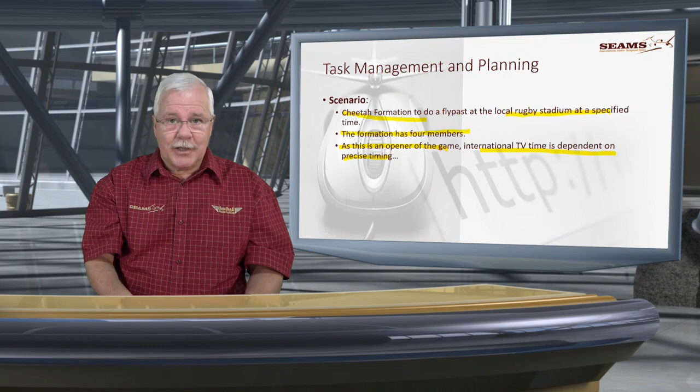Now there's a lot to say. Obviously, if you're in the sky, you are visible from there to there. So you're going to be visible for, let's say, 15 seconds or so before you actually overhead. But we're going to work on overhead time.

First one, clearances. I think this is quite important that we speak about it, because a lot of people think you just jump in and you're going to perform at this air show or with this opening of a school or whatever.

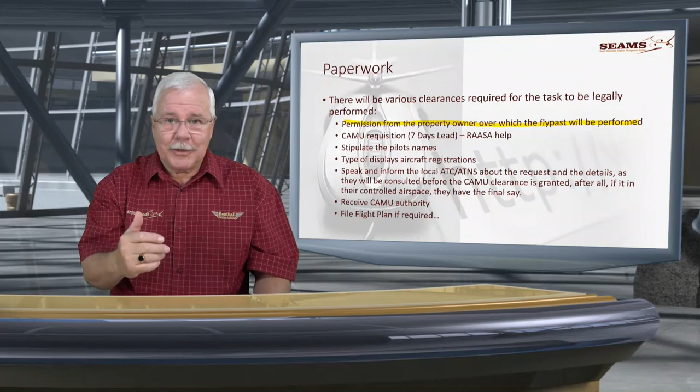There were various clearances and tasks to legally perform: permission from the property owner over which the flypast will be performed. There must be a request, okay? There is a request and then a permission that you can be part of it. Don't skip this - not word of mouth. Written, letter, proof, proof. When you go and you've got to defend your actions later on, there must be proof.

And then you've got your CAMU requisition, which is 7 days lead. RAASA can definitely help there. Stipulate the pilot's names, type of aircraft.

What we normally do is we start speaking with the local ATNS and all that. Although we get the clearances, remember that if it's in their controlled airspace, then they still need to know, and they've got preferences with other traffic, and they can give you quite a bit of trouble. So there must be prior communication, all right?

Talk it out nicely - this is what we want to do, this is the dependency, this is the time, this is where you're going to be, so that people can make plans, so that we don't interfere with national, international flights and stuff like that.

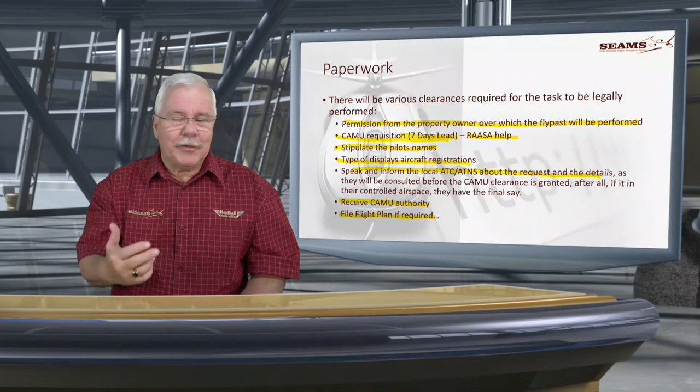Receive the CAMU authority, and then a flight plan if required. Flight plan is just one of the pieces of paper again, all right? Don't get frightened when you think about the flight plan. Put the thing in, because then ATC is now officially warned that you're going to be there. And you've spoken to them, and you made it official, and you've got the CAMU clearances and all there. So you should be ready to rock and roll.

In the beginning, the first thing is the leader of the formation needs to be appointed. Now I've spoken about this before - we tend to say, okay, you're not so good at flying there, so we're going to make you a lead. Lead, in this case, has got a phenomenal amount of planning to do. In the flying, in the execution of this flypast that you're performing, it's going to be important that he can think and fly. So be careful who you take as the leader.

The leader is briefed on precise requirements. Lead starts by studying the layout - Google Earth, map 1 in 50,000 if it's over an area, if you can get hold of such a large map. Not 1 in 500, not 1 in a million, 1 in 50,000. Google, I think that is probably presently the answer. I'm not even sure if they still make 1 in 50,000 maps.

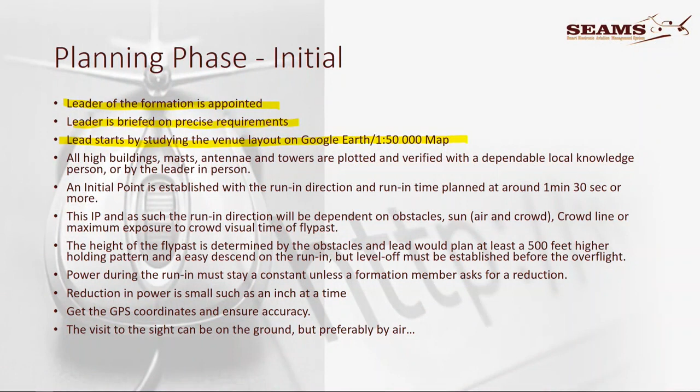All high buildings, masts, antennas, towers, everything must be plotted, and you plot it on. So let's say you've said, this is the area I'm going to work in. You take a picture from that, from Google Earth, and you start plotting your dangerous areas. You have to know the lay of the land.

No, you're not there yet - you haven't tried it, you haven't seen anything. This is prior to the thing. There must be excellent, proper planning. Remember, once you're in the run, you can't say, oh, I didn't think about that. That's going to be a national disaster if it's on the TVs and stuff like that.

An initial point is established with the run-in direction and the run-in time plan around 1 minute 30 seconds or more. Why do we take such a long run in? Well, remember that once you're established on the run in and everybody is running towards the target over which you're going to perform, people have got to settle in, everybody's got to form up nicely, and as I said, from 30 seconds to prior overhead, you better be in good formation, otherwise it's going to look bad.

And by the way, you're going to stay in that perfect position over and out, because people will watch you as you come, and they will watch you as you go. So it doesn't mean that just once you're over it, now you can relax. You can't. You must stay in perfect formation.

The initial point, such a run-in direction will depend on the obstacles, the sun, the crowd, the maximum, you know, all the distances. So you actually work it out from which way.

Remember that it doesn't help that you just come from any side and the TV guys or whoever is running the scene on the ground don't know which direction you're coming from. So there's a lot of liaison. Once you work out the plan, cover it with them, well knowing that for them it's going to be very difficult to film you if you come out of the sun.

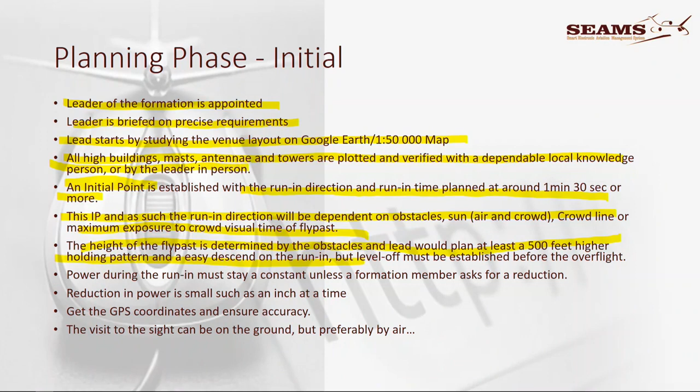The height of the flypast is determined by the obstacles should be at least 500 feet higher than the holding pattern, and the lead plan at least 500 feet higher than the holding pattern. In other words, on the run-in we can go slightly lower, but the run-in or the holding pattern is at such a height that you do not have to pay attention to obstacles.

The only obstacle number 2, 3, and 4 is worried about is number 1. The only thing number 1 is worried about is the timing. Where are we, and when must I set heading that last minute and a half or 2 minutes, or whatever I decided, so that I can be within the visual time slot overhead.

Power during the run-in must stay constant unless a formation member asks for a reduction. By that time you should have sorted it out. Reduction in power is very small, just an inch at a time.

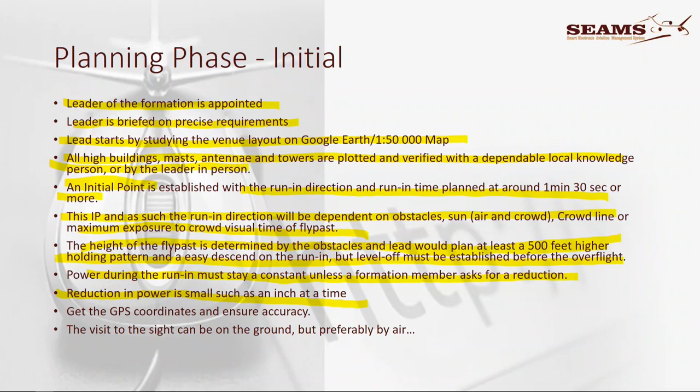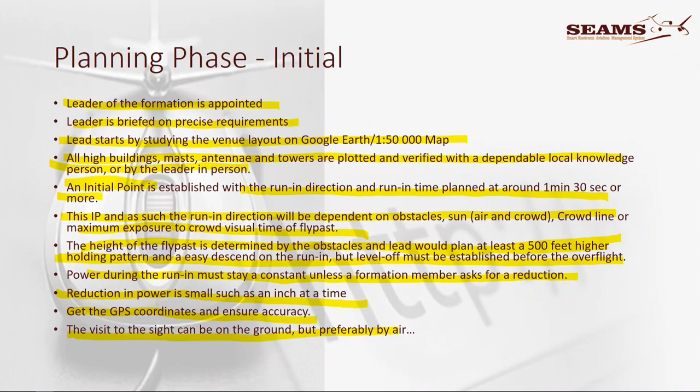Get the GPS coordinates and ensure accuracy. Visit the site. You can visit the site on the ground if you want to see it.

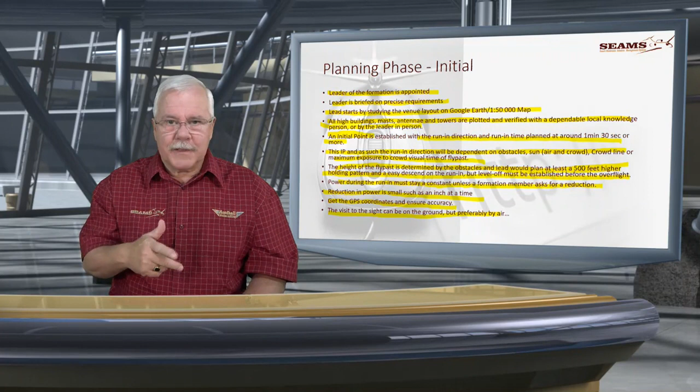If there is prior planning involved, I would normally just go out with an aircraft, fly the circuit myself, do a run-in at a timing run, and fly over the area where I was going to be, just to get myself au fait.

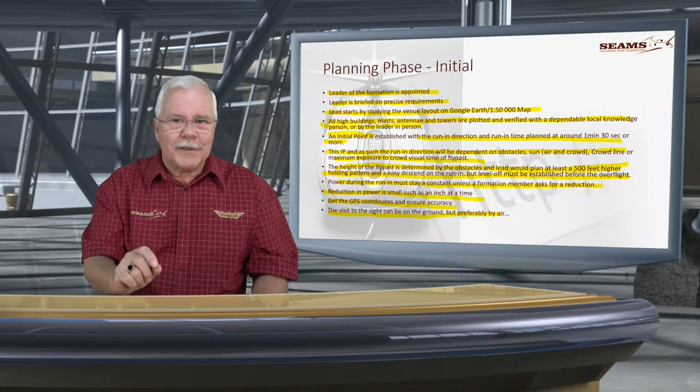And look, sometimes we can't, because we go to a far away place. I mean, Scully and the guys can't go and do a timing run here, there, and everywhere. So it just needs good planning, excellent planning beforehand.

Here I've got a little sketch of a flight path plan, and the first part I want to show is this is the target area, this is the holding area. Here I set plus 500 feet.

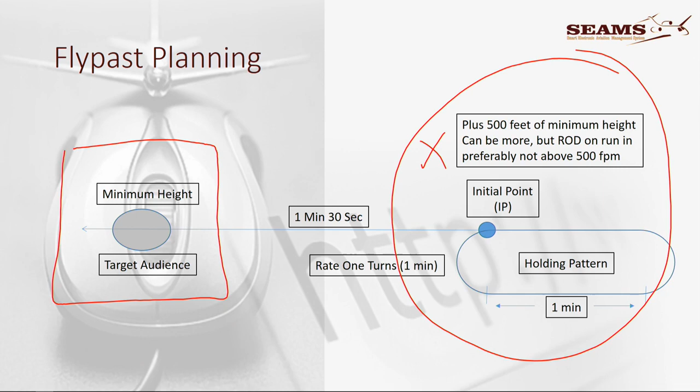Minimum height can be more, but rate of descent on the run-in is preferably not above 500 feet per minute. The run-in, that little part in between, if you're at this height and you need to be at this height, that's the descent, and then you level off at the next height.

Remember that if the changes are minute and small, descending 500 feet in a minute and a half or 2 minutes will give you a rate of descent of 250, 300, 350 feet a minute. That's the kind of thing you must take into consideration.

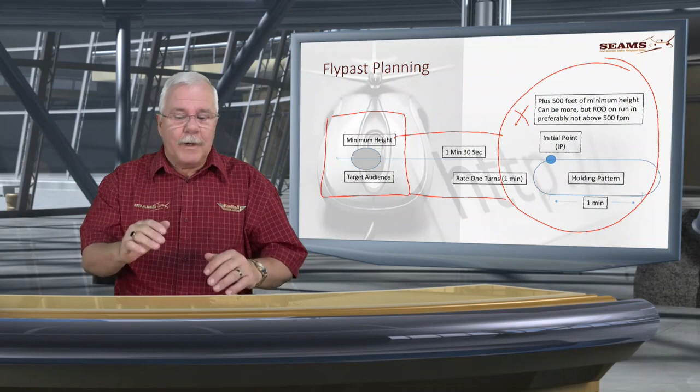Don't make it difficult. If you can run at the same height, cool. Then normally we just fly a little bit lower when we actually time over target. But in many cases, I've flown this where we maintain exactly the same height right through the whole exercise.

I've got myself an IP point. Let me mark it there for us, IP point. And then there I start my run, and I've got my holding pattern. The formation sticks with me.

Tight formation flying very neat takes a phenomenal amount of concentration. So in the holding pattern, the people are sitting in formation, but they sit a little bit more loose.

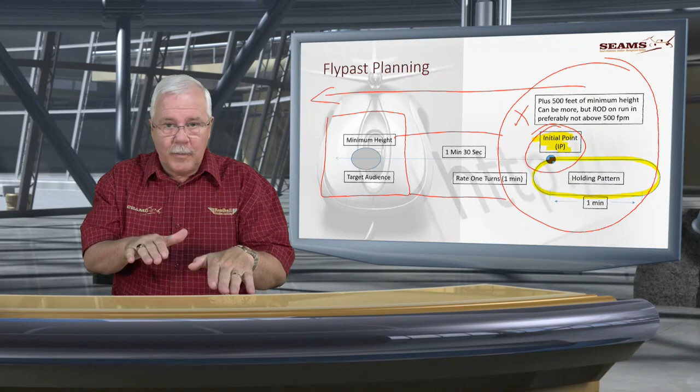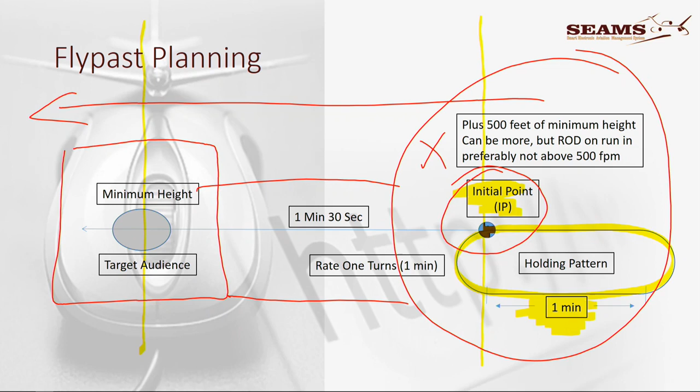And then as you're coming for the run-in, the people will tuck in. That's when you form up, get the formation stabilized, and the leader informs the rest of the crowd. Here you can see I'm working on 1 minute legs, and from this point to this point, that amount of time normally comes into play.

Now, many times the guy on the ground, because we've got a ground liaison person in this case, just talks to say, are you early, are you late? Because it happens that sometimes the podium or the walkout, because the watches weren't perfectly synchronized, or whatever the case might be, the overhead time can change.

Now, I've been in situations due to technical errors on the ground where the actual overhead time changed by as much as 15 minutes. And you just keep on circling.

Don't get upset. You're doing the greatest thing in the world, you're having fun in an aeroplane. Don't panic. If there's a delay, it's fine.

But now the leader must start working out: if the new time over target is this, minus the 1 minute 30, what is the time to set heading here? Once he's got in his mind what his set heading time is, he's got this. And remember, a rate 1 turn will take you 2 minutes.

So this is 1 minute, this is 1 minute, this is 1 minute, and this is 1 minute. If you do a full pattern, it's a 4-minute pattern. But you can cut these out and get it down to 2 minutes. If you still need 30 seconds, there are other ways to do it.

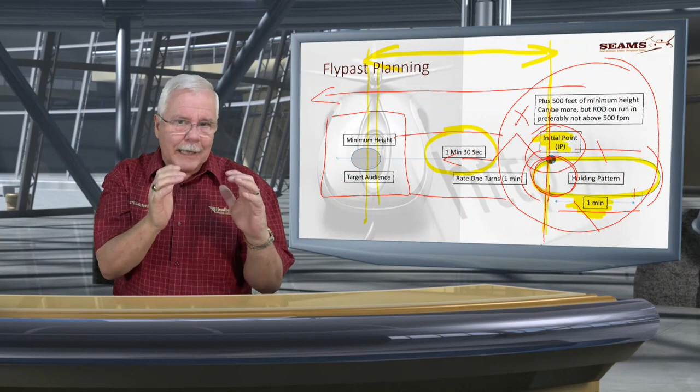Normally time over target is quite possible to be within a 5-second period. And a 5-second period in anybody's book, remember, because the moment that you start running in, the cameras are on you. It doesn't matter when you're there, right enough, they're going to follow you through anyway, but you need to be in that time bracket for the visual of whoever's on the ground.

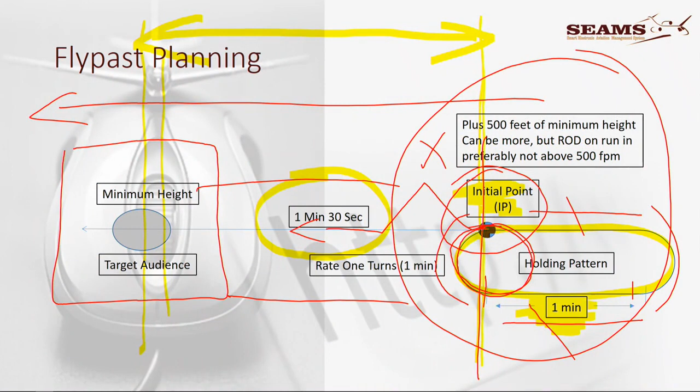Very stable. Call that you IP running in, the formation here is that the person in contact on the ground will know that. If there's no person on the ground, it's a little bit of a problem, because then you're just working on synchronized times before.

Then the second one here is that you've got 1 minute 30 seconds, 1 minute 30 seconds, and steady. Now we fly over and we do it as great as we can, and we continue on.

Fly at least 30 seconds over if you can. I'm talking now about just the fly past, okay? Because if you start turning too early, the positions might not be that smooth in the formation anymore.

So you go over, remember the camera is going to follow you, stay in your position, and about 30 seconds the lead will say, 'cheetah formation, left turn, go, 2, 3,' and he will ease it in very, very smooth to start the turn, and everybody just keeps their position because you're now etched.

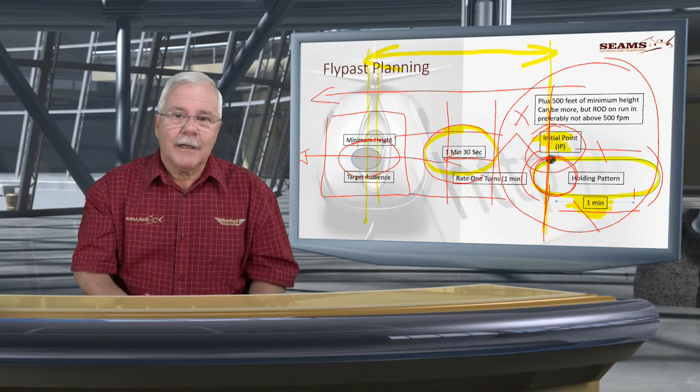In many cases, you're etched against the skyline and they can see how you're flying. Still no relaxing until you're out of sight, out of mind.

Okay, the timing phases. The timing run is well prepared, GPS. You've got your initial point, the indicated airspeed, power relationship, taking it into the formation members.

You would have worked it out, and you have to settle the power problem before you even get to the hold. So from wherever you take off, once you're in the formation, for the conditions pertaining at that specific day.

Not a good idea to take passengers in any of the aircraft. If there is an extra member on board of any aircraft, it may be in the lead. But you don't want to take away the power capabilities of anybody else in that. As a rule, we don't put a second person.

The only reason there's then 2 people in the lead is to help with the planning and the radio work and stuff like that, because nothing stands still. It's a total dynamic exercise.

Power management is one of the big crises, but as you start doing formation, you will get to know that problem intimately.

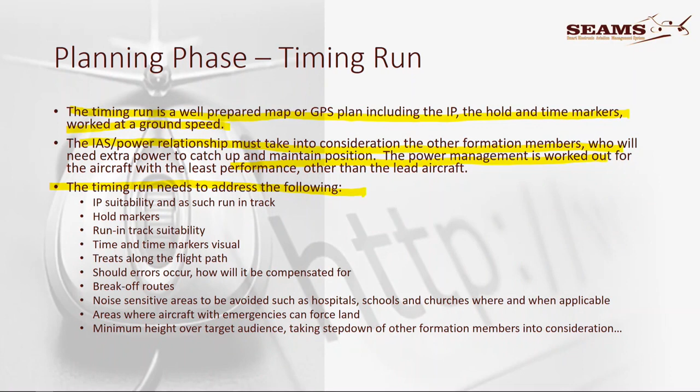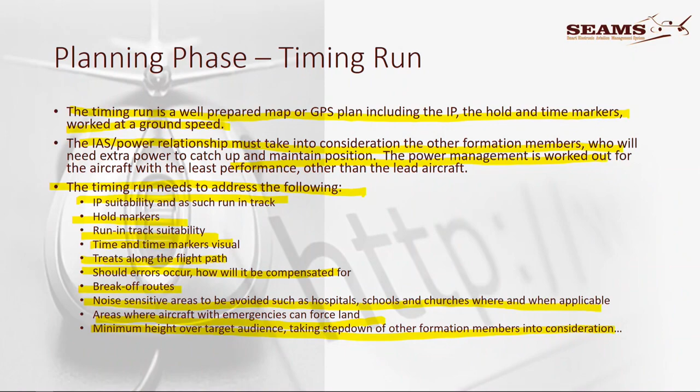The timing run's are the following: IP suitable, hold markers, run-in track suitable, time over target, threats along the paths, how would you compensate for errors, break-off routes, noise-sensitive areas, areas where aircraft emergencies can force land, minimum height, and there's just a whole lot of stuff to think of, and that's all on the suitability.

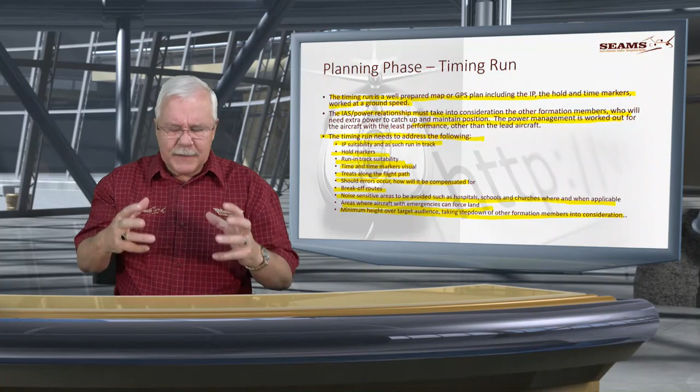From your IP, are you going to do a hold where it's above a school that's busy? That's going to be a little bit of a problem because they ain't going to like it. Because you're going to now sit in the hold for 15 minutes and somebody is going to be getting upset with you. So just think about the obstructions, what you're going to do, emergency capabilities, and so on and so forth.

Now just a couple of tips for the planning. In the next session, presentation 5, I'm going to stitch everything together. We're going to take a practical one, run it out through the briefing, run it out how sequentially things are going to happen, and then we're going to put it together.

Just a reminder, if you haven't seen the previous ones, start with one, because in the first presentations you are being exposed for the first time to the types of formation, and as you go I've built it up to the point where you understand the radio calls, the types of formations, and the dynamics of the formation. So in section 5, hold on, then we're going to stitch it all together.